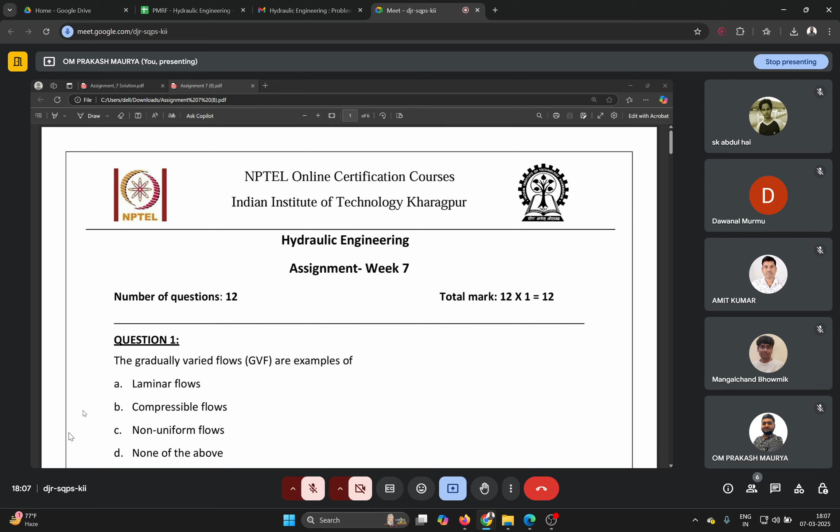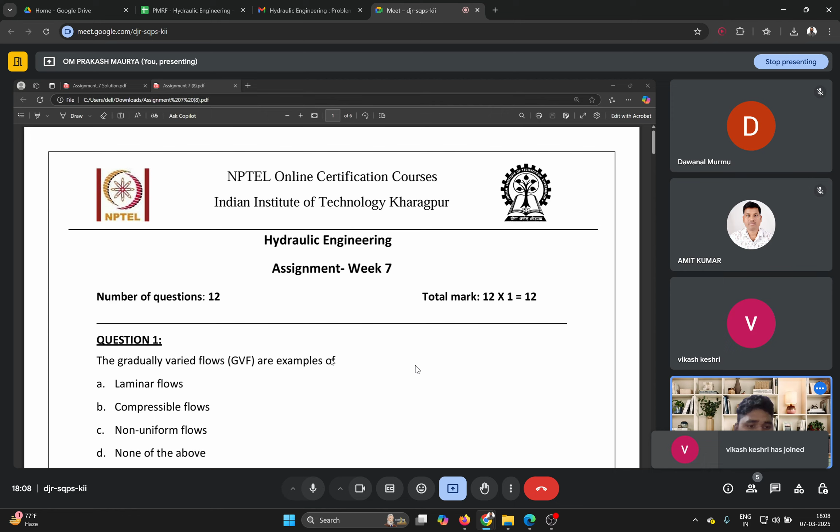Okay, let us start. So the week 6 content I have already recorded and uploaded. So please, hope you all visited.

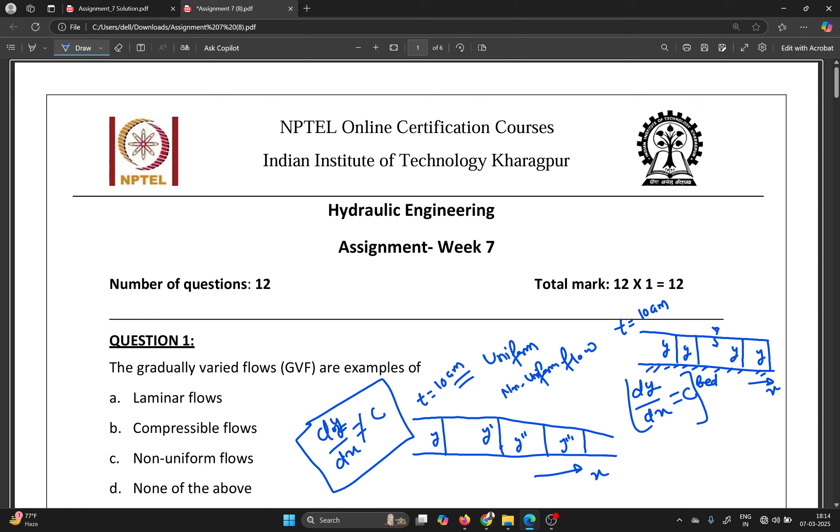But here the question is about gradually varied flow. So actually non-uniform flow has two types: one is GVF, gradually varied flow, and RVF, rapid varied flow. So gradually varied flow means - whatever the depth is changing, it changes for a long distance. The change, that is y to y dash to y double dash, is very gradually changing. So that is gradually varied flow.

A rapid varied flow means - let us suppose here is a gate, and water is here, water is like that. Here the depth is very less, here depth is increasing within a short span of distance, the depth varying much from this level to this level. So such type of flow is known as rapid varied flow. Always remember please. So the answer of this question is non-uniform flow - gradually varied flow is non-uniform flow. Hope you all got it.

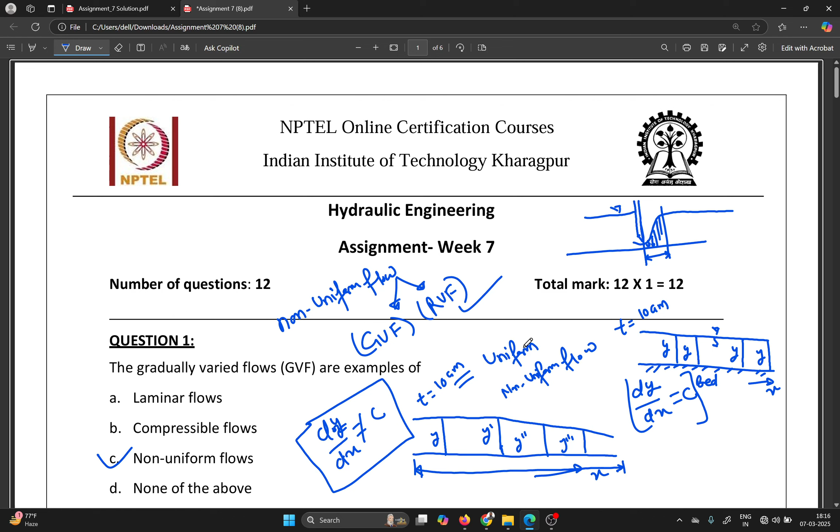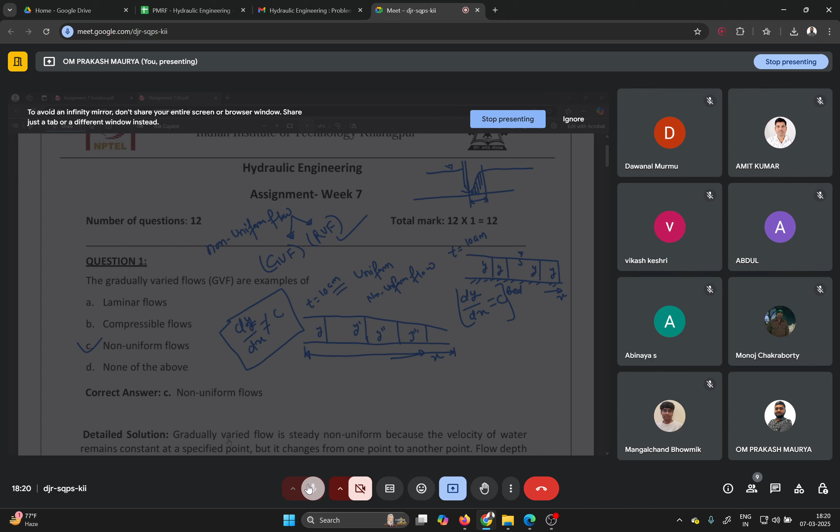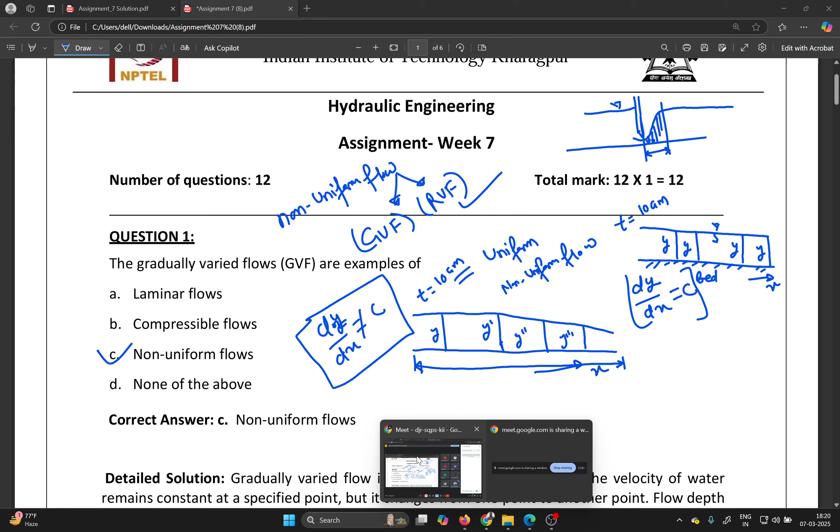Okay, so hope everyone got it, question number one. If you're not able to, whether you are getting it or not, let me open the video. Yes please, whether you all are able to understand or not, question number one. If anyone is not able to understand, I can re-explain, otherwise I'll move to question number two. Please, if you have not got it, write in the comment.

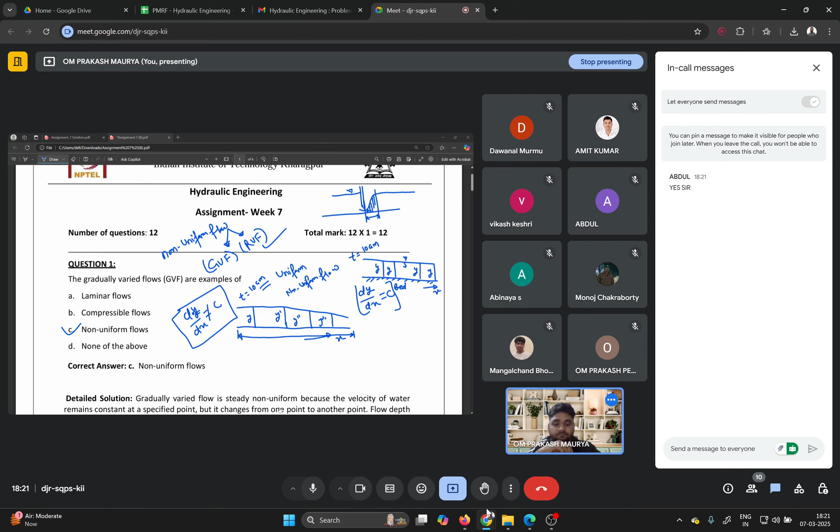Okay, here the answer is visible. The dynamic equation of gradually varied flow is based on the assumption that the equation of gradually varied flow is dy by dx equals dE by dx divided by 1 minus Fr square. Here dE by dx is S naught minus Sf. Remember, that is the change in energy with respect to distance, or you can say specific energy, not energy, specific energy.

In the derivation, we assume the pressure distribution is hydrostatic. Here it is non-hydrostatic, so this statement is irrelevant, not considered. Roughness coefficient depends on flow depth - this is also wrong. So that's why the answer is none of the above.

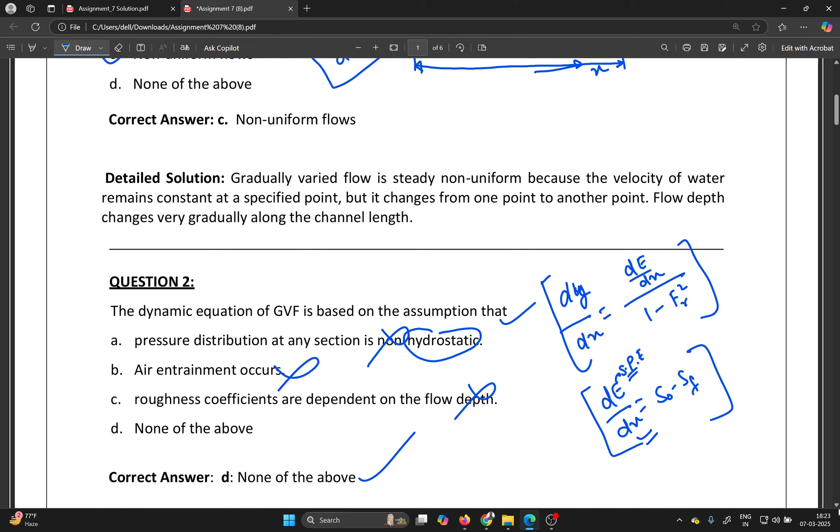Now we'll move on to the next question. Question number 3, very important question: the value of specific force at two flow depths y1 and y2 in a natural open channel is the same. Then the depths y1 and y2 are called: sequent depth, alternate depth, either of both, or none of the above.

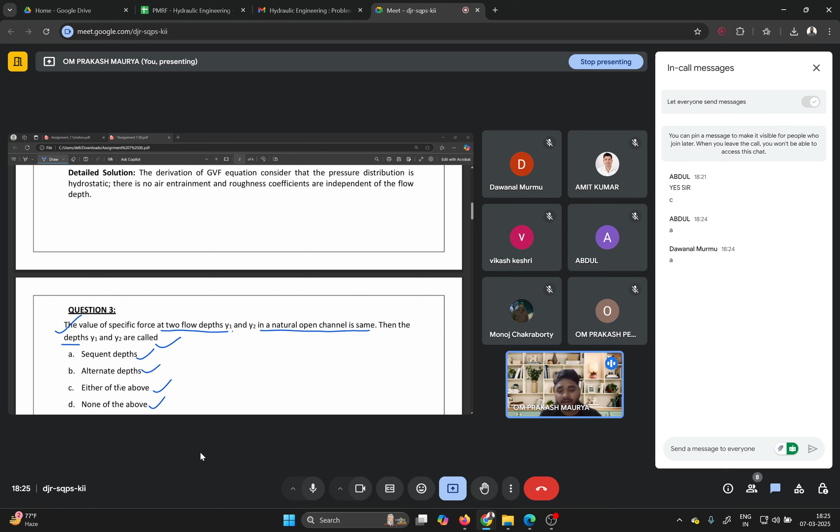For alternate depth, the specific energy should be the same at two depths, then you can go for alternate. The answer would be alternate, but here it is specific force. So option A will be correct for question number 3.

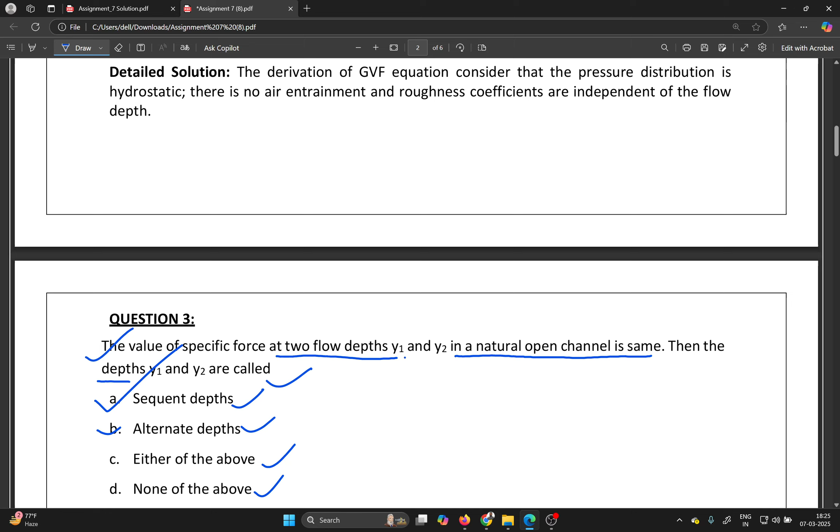Now we'll move on to question number 4. The question is: total number of possible types of GVF profile. Please everyone write your answer. Total number of possible gradually varied flow profiles are: 12, 5, 6, or 10.

So actually we have 5 types of slope. First one is mild slope, second one is steep slope, third one is critical, fourth one is horizontal, and fifth one is adverse. In these 5 types of slope, how many profiles do you have - whether 12, 5, 6 or 10? As a hint, I've given you the 5 types of slope we have in hand.

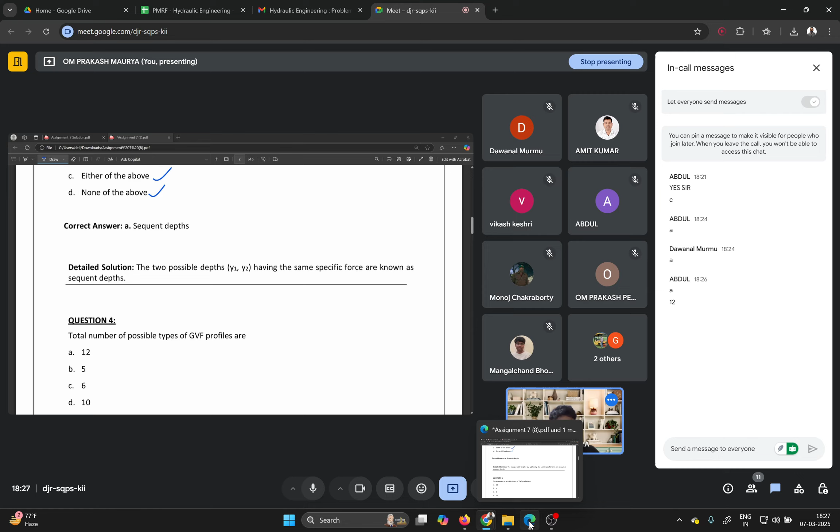Okay, let me explain a little bit. So actually in GVF profile you have 12. Yes, option A is correct, but how?

We have 5 types of slope: one is mild, second is steep, third is critical, fourth is horizontal, and fifth one is adverse. Mild is like that, steep will be very like that, critical you may assume like that, horizontal is complete horizontal, and adverse slope will be just opposite.

All slopes go in this direction - but the slope direction, not the flow, I am not showing the flow here, just the slope direction. So we have here 3, and here also 3, here 2, here 2, and here 2. So 6 and 6 makes 12. For how this works, you need to go through the detailed video whatever sir has already taught in week 7 content, so you can get a very clear concept about the 12 profiles of GVF.

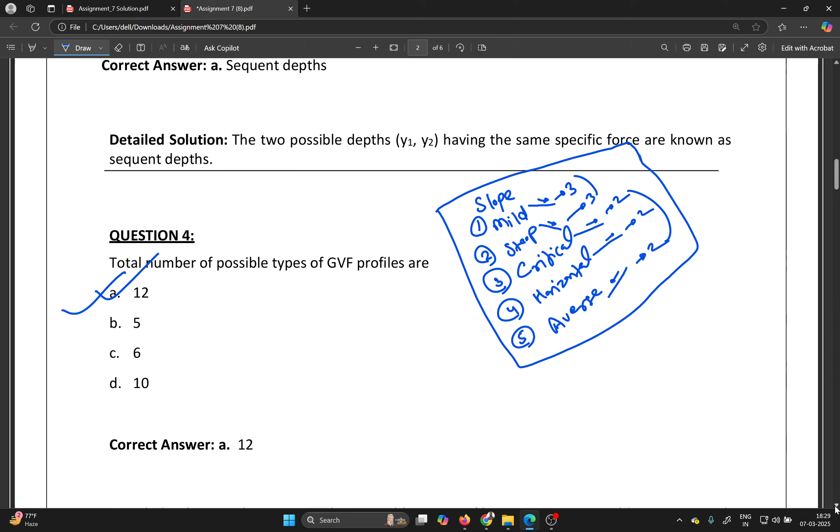Now we'll move on to question number 5. Question number 5 is: in GVF, as the value of water depth approaches the uniform depth, or you can say the normal depth, the water surface meets the normal depth line vertically.

Or it meets a very large depth as a horizontal asymptote, or approaches the normal depth line asymptotically, or none of the above. Which option will be correct for question number 5? Everyone please write your answer in the chat box.

For question number 5, in GVF, as the value of water depth approaches the uniform depth, the water surface approaches - option A is meet the normal depth line vertically, option B is meet a very large depth as a horizontal asymptote, option C is approach the normal depth line asymptotically, and option D is none of the above. Which option will be correct for question number 5? Everyone please write your answer.

These are very important questions.

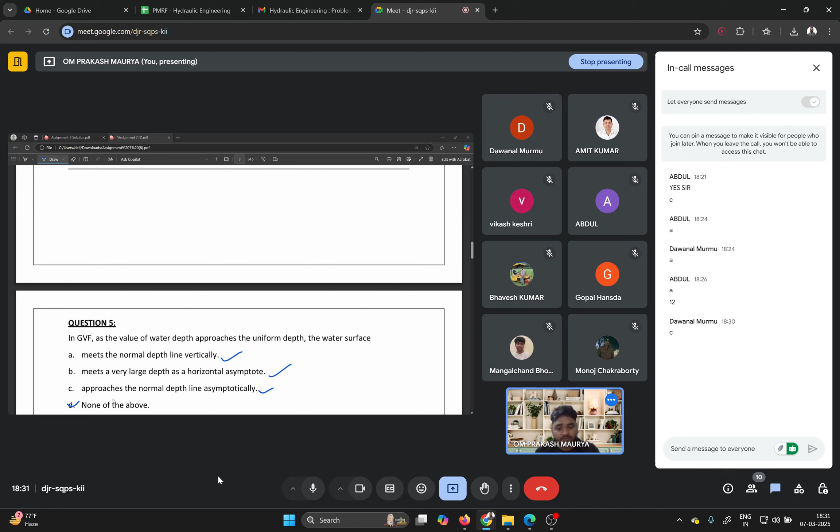C, approach the normal depth line asymptotically. Yes, you are correct. So as the value of water depth approaches the uniform depth, it approaches the normal depth line asymptotically. Means, if I consider the mild slope here, this is your critical line, this is bed, this is your critical line, and this is your normal line, or normal depth line. So here it meets asymptotically, like that. Right, remember.

Option C will be correct for this. For question number 5, option C will be correct. Now we'll move on to the next question.

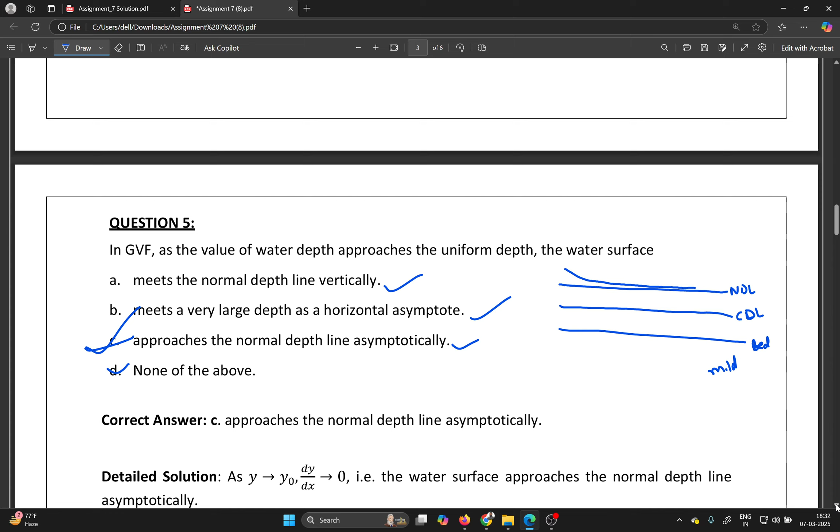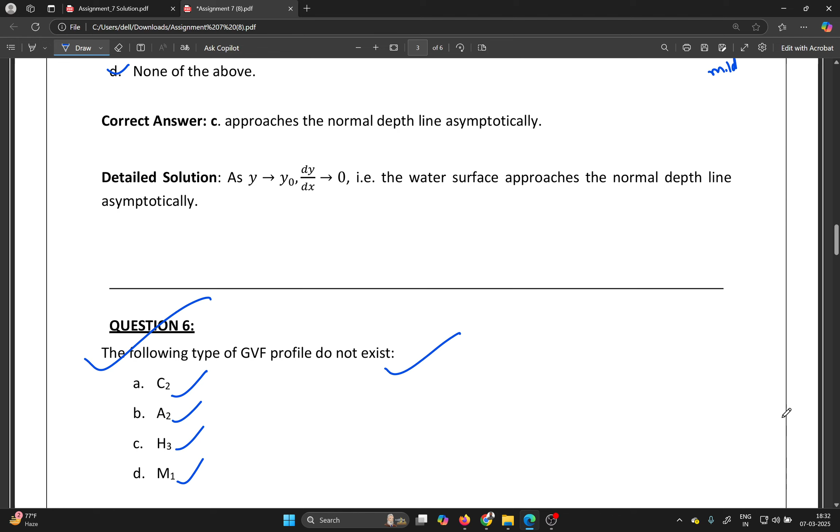Next question is question number 6. The following type of GVF profile does not exist: C2, A2, H3, M1. For question number 6, please write your answer in the chat box. Very easy question. Following type of GVF profile does not exist.

Okay, Abdul is telling C2. Other participants also try to write your answer please. Everyone please. For question number 6, everyone please write your answer. Abdul is telling C2, means option A. But what about the other students? Okay, D, M1 you are telling. Dawanal is telling option D, M1. Okay, you are telling C means H3. Okay, not D, H3, okay.

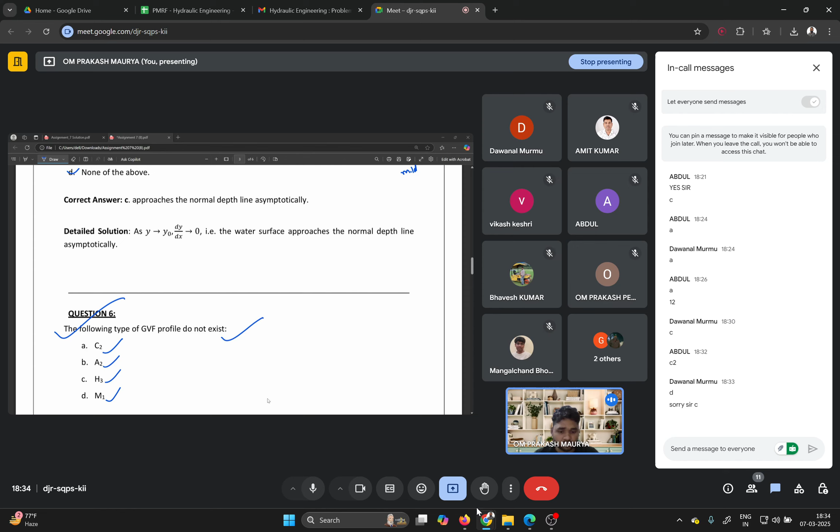So here the answer will be C2. How C2? Let me explain: if your slope is critical, your NDL, this is bed, equal to CDL, critical depth and normal depth will be same. So this is bed, this is your critical depth, and this is your normal depth line. So this is 1, this is 2, and this is 3.

So 2 is zone 2, in between NDL and CDL. Here NDL and CDL is same, so zone 2 will not be possible, but above the NDL is 1 and below the CDL is 3. So NDL CDL is same, so here 3 exists, but 2 is not possible because 2 is in between the CDL and NDL. Hope you all got it.

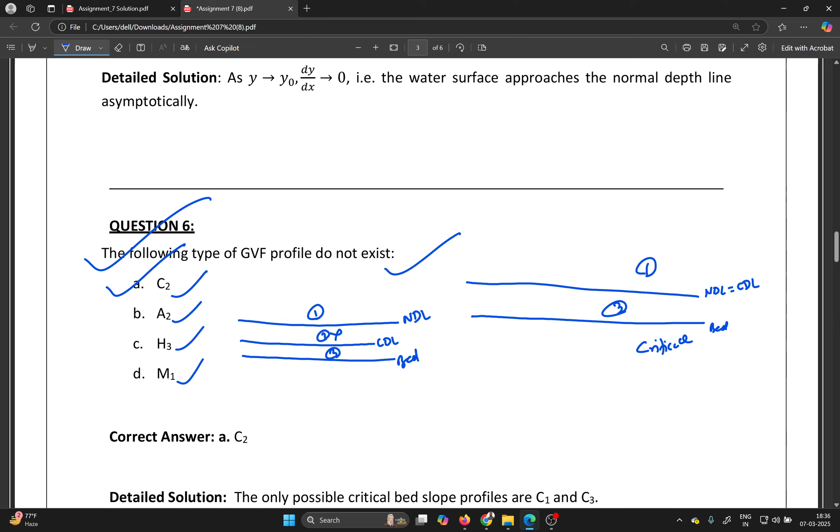Question number 6, now we'll move on to question number 7. The post jump Froude number in a horizontal trapezoidal channel is: less than unity, equal to unity, more than unity, or none of the above. Which option will be correct for question number 7? Just think please.

For question number 7, okay, less than unity. Other students please also try to write your answer. Here we are talking about post jump Froude number. So you have to think after the jump whether flow is critical, subcritical, or supercritical. Based on that, give your answer.

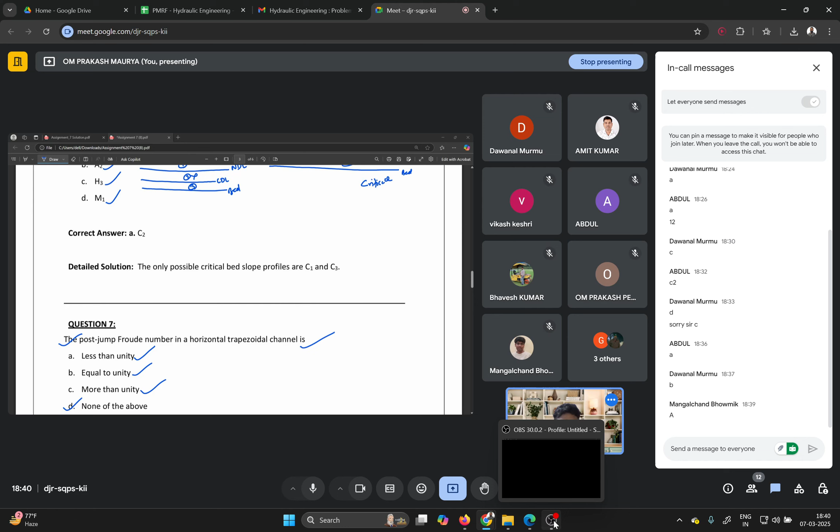Let me just discuss whether A or B, which option will be correct. So just think, after the jump, for hydraulic jump, your flow needs to go through two phases: supercritical to subcritical. Means if I write here supercritical and here subcritical, and here is hydraulic jump, this is pre and this is post. If these two conditions happen, then only hydraulic jump is possible.

So before hydraulic jump, your flow should be supercritical, and after that, subcritical. So here the question is asking about post jump, meaning after. Means subcritical Froude number less than 1, supercritical Froude number greater than 1, and for critical, Froude number is 1. So here we are talking about only post, so your Froude number will be less than 1. Option A will be correct for question number 7.

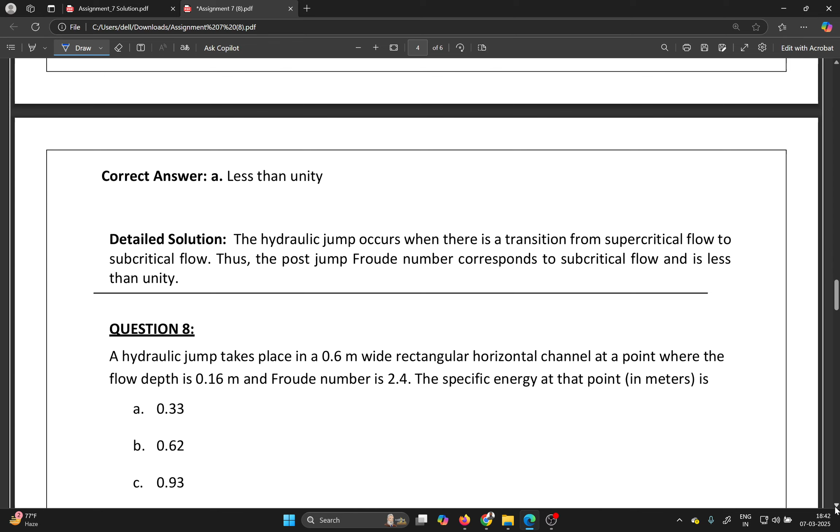Now we'll move on to question number 8, very important question. A hydraulic jump takes place in a 0.6 meter wide rectangular horizontal channel. Rectangular horizontal channel, remember please, horizontal channel means theta will be 0 degree. Rectangular you all know. At a point where the flow depth is 0.16 meter and Froude number 2.4.

Specific energy at that point, you need to calculate specific energy. So everyone please first understand the question, then try to solve it. Everyone please. Very important question, actually very fundamental and basic question. So everyone please try to first understand, then try to calculate.

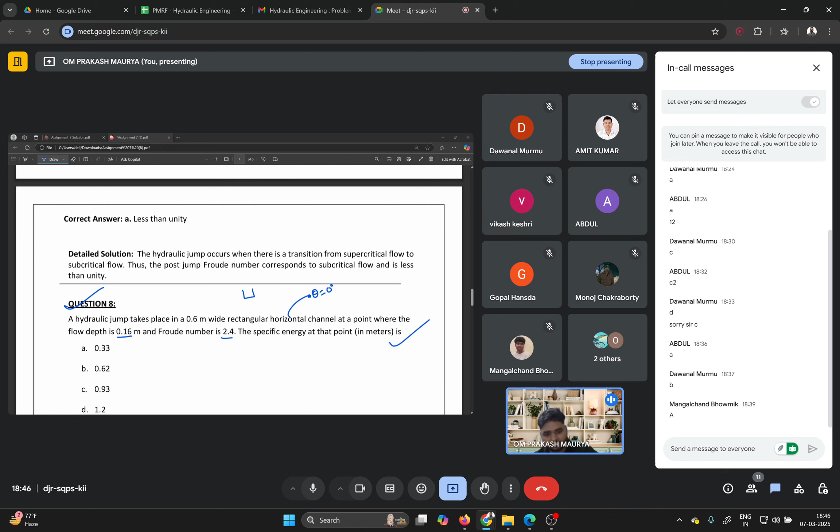Okay, let me discuss. So here we have a rectangular channel with theta 0, 6 meter wide, 0.6 meter, where the flow depth is 0.16. The Froude number is given as 2.4. Specific energy at a point is equal to Y plus V square by 2g, for theta equal to 0 and hydrostatic pressure distribution.

Based on these two assumptions, your specific energy formula will be like that. So Y is given as 0.16. V is not given, so you know Fr equals V over root of gY. For a rectangular channel it will be Y, otherwise Fr equals V over root of g times A by T, or D equals A by T, so here you can put the T. That is the hydraulic depth, not hydraulic diameter. Okay, we have the question.

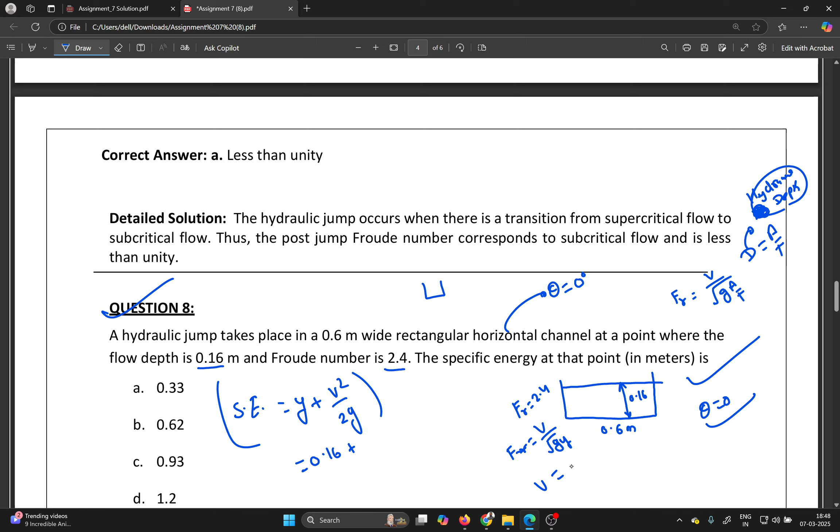We'll clear the terminology later. So here, you can calculate V: 2.4 into root of g into 0.16. So V is how much? Please anyone write the answer. What is the value of V? Please just calculate and write in the chat box.

Or let me just calculate. So 9.81 into 0.16 is equal to root over into 2.4, that is 2.68 velocity. Okay, final answer you are telling 0.62. Let me just check. So 2.68 velocity meter per second. Here you can write 2.68 square divided by 9.81, 2 into 9.81, so divided by 2, divided by 9.81, plus... oh sorry, 2.68 square divided by 2 divided by 9.81.

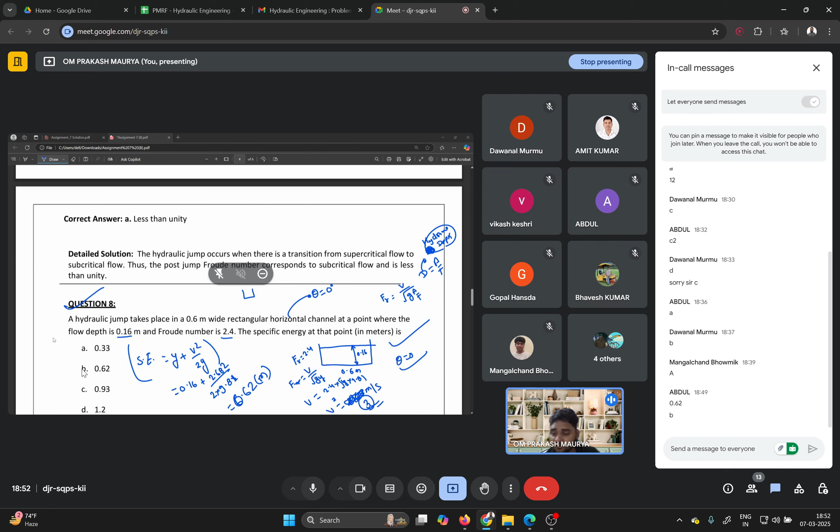Now we'll move on to the next question. Next question: in the above problem, if the post jump flow depth is 0.47 meter, then the energy loss associated with the jump is... Here the post jump flow depth is given. Pre jump was given previously as 0.16 and post jump is given as 0.47. Now you need to calculate energy loss. Very important. In the previous week 6, I discussed the formula for energy loss, but here you need to write first your answer for question number 9.

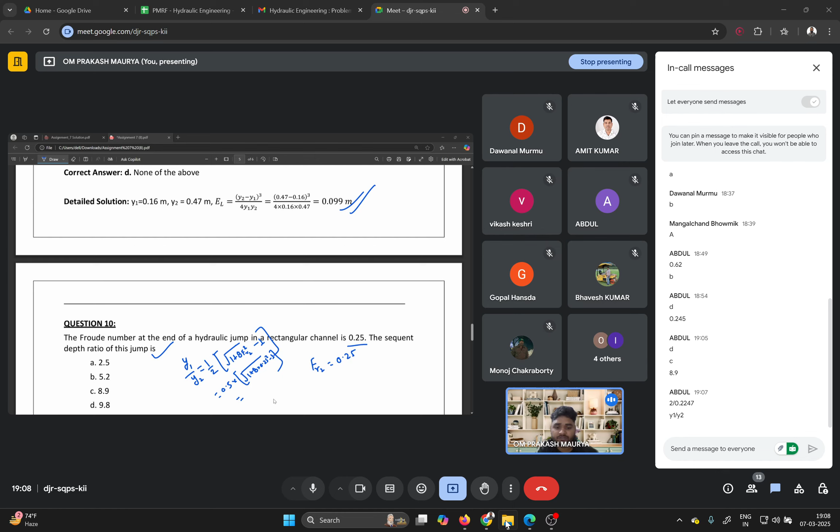Okay, you are telling y1 by y2. Okay, I have put it as y1 by y2. Let me just see the calculation. Yeah, the answer is 8.9. So yes, I got this one. 0.112. Yes, the calculation is y1 by y2 is 0.1123 I am getting. But here, if the answer is not matching, you need to just write like that. You just check whether this is matching or not. If this is not matching, then it means your answer is wrong.

But if y1 by y2 is not matching, let me just check y2 by y1. So just the opposite: 1 divided by 0.1123. Yes, it is 8.903. So you can write 8.9. So like that you need to check also, because here it is asking about the ratio, depth ratio. It doesn't mean like that you need to give only y1 by y2. You can also give y2 by y1. So based on that you check your answer here.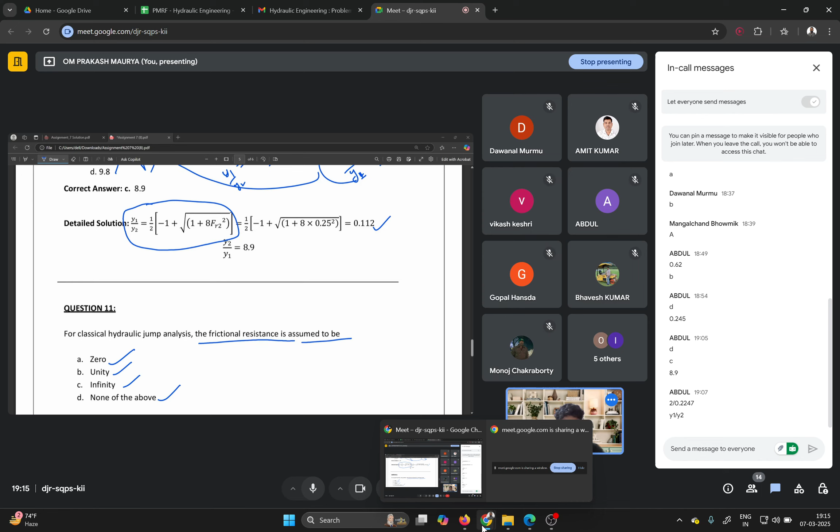Okay, now let us start. So for classical hydraulic jump analysis, the frictional resistance is assumed to be 0, because the hydraulic jump actually happens within a short span of length, so we can neglect the frictional resistance. In the derivation we neglect it for simplification. And classical hydraulic jump means jump in a rectangular channel.

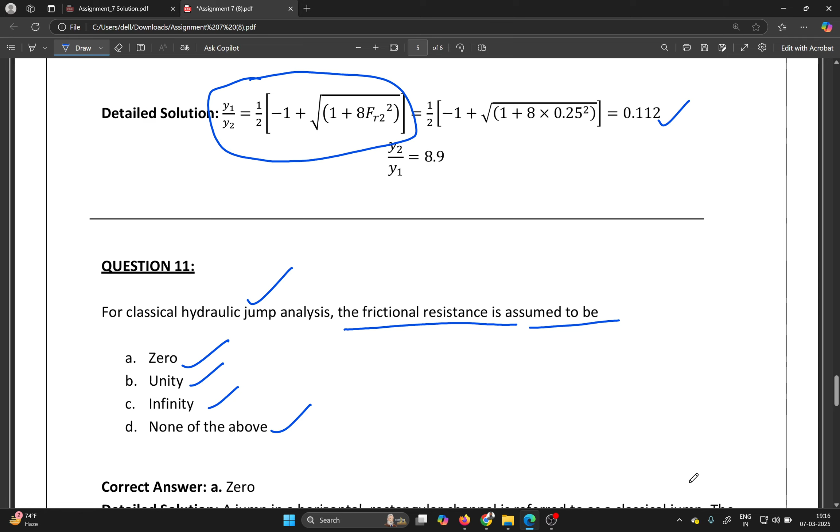Okay, next question, question number 12: the mathematical analysis of hydraulic jump is based on conservation of kinetic energy, total energy, linear momentum, or all of the above. Please everyone, for question number 12, everyone please write.

D, all of the above. Okay, Amit is telling all of the above. Other students please. The mathematical analysis of hydraulic jump. Okay, Anurag is also telling D option, all of the above. Anyone want to write? Then after this, actually we have only 12 questions in this set. I have another set also, so we'll solve another 12 questions. So okay, Mangal Chand is also telling D.

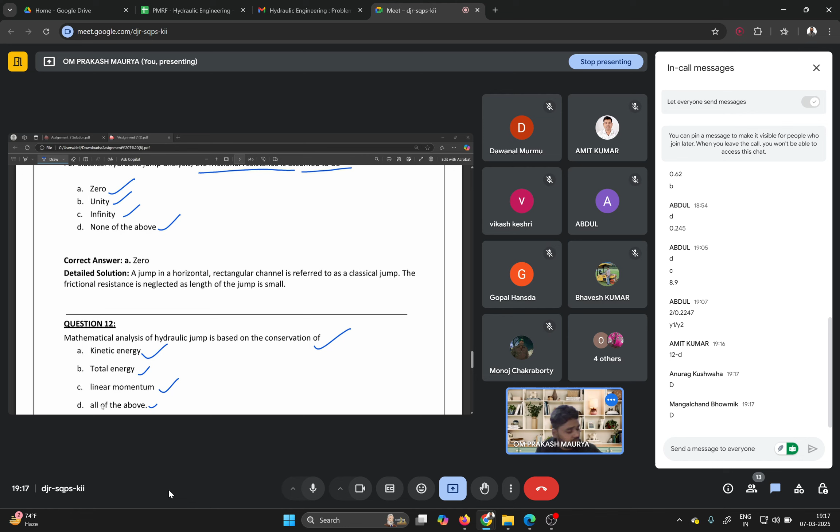So actually in hydraulic jump, during the derivation, the energy is not conserved. Why? Just for example, let us suppose a jump is happening. Here energy is not conserved because of energy losses in the jump. So we will not use the total energy concept for the derivation. We only use the linear momentum concept for the mathematical analysis of hydraulic jump. We cannot use the energy concept. Remember always please: this is because of the loss in energy during the hydraulic jump. So we don't know how much loss. If we don't know how much loss, then how can we apply the energy concept here? So we'll use the linear momentum concept. Remember always.

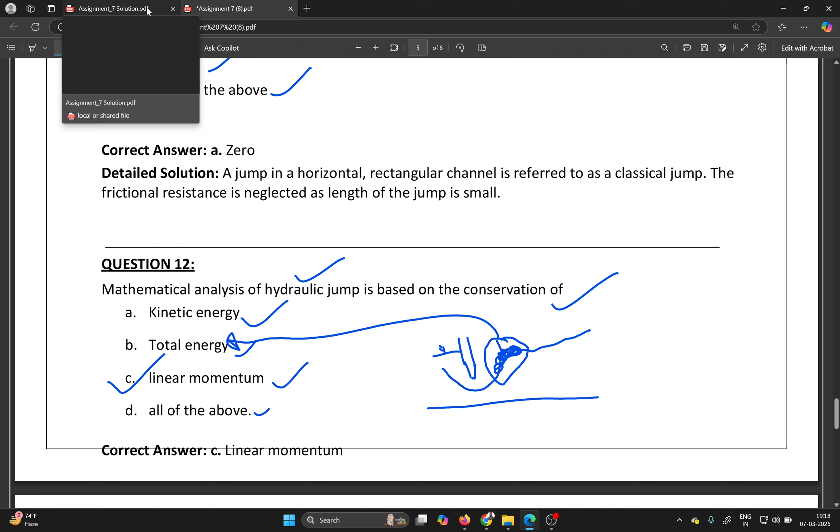So now let me just... question 1. Oh, I think it's not visible. Okay.

Whether it is visible, okay. Question 1 is visible. Please everyone write, anyone can write.

So question 1 is, if the value of rate of change of specific energy is 7.03 into 10 to the power minus 4 meter, and SF, that is slope, energy slope, is given as 0.00013, calculate the value of bed slope. So here you need to calculate the bed slope value.

So just in the previous set of questions I have told you the equation of gradually varied flow. In that equation I discussed about the rate of change of specific energy and the formula also. So please think and try to calculate, and write your answer in the chat box for question number 1.

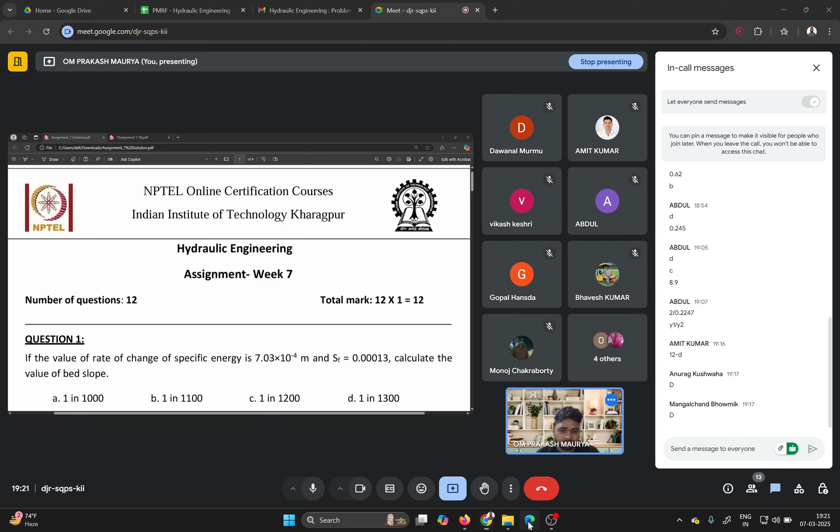Important question. Everyone please. So the formula is S naught minus SF. Now please you need to calculate S naught from here. Please everyone try to calculate for question number 1. Everyone please.

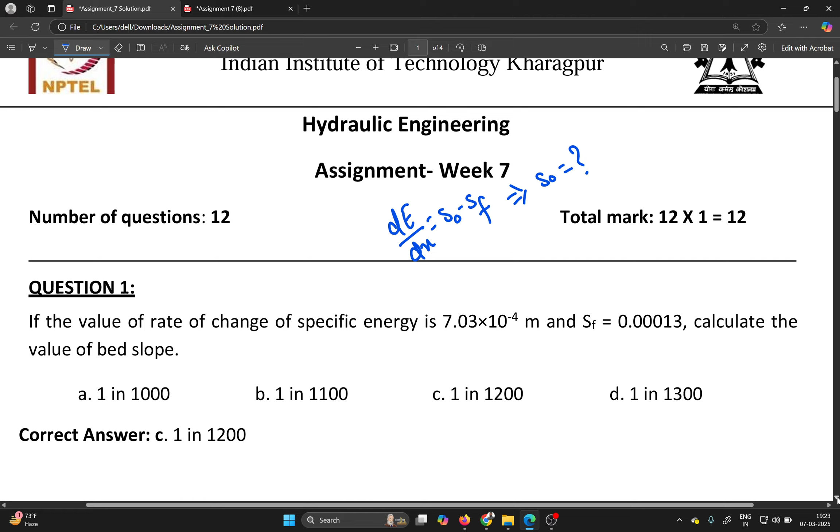Now we'll move on to question number 2. Question 2 is about when the hydraulic jump is in a moving form. Moving form means the hydraulic jump is called negative surge, positive surge, turbulent surge, or accelerated surge. Moving surge means, let us suppose a bed, and the surge is moving like that, moving in the flow line.

So please write your answer for question number 2. Okay, D option, accelerated. Other student please. C option, turbulent surge. Other student please, Monoj is telling C, Abdul is telling B, D. Anyone?

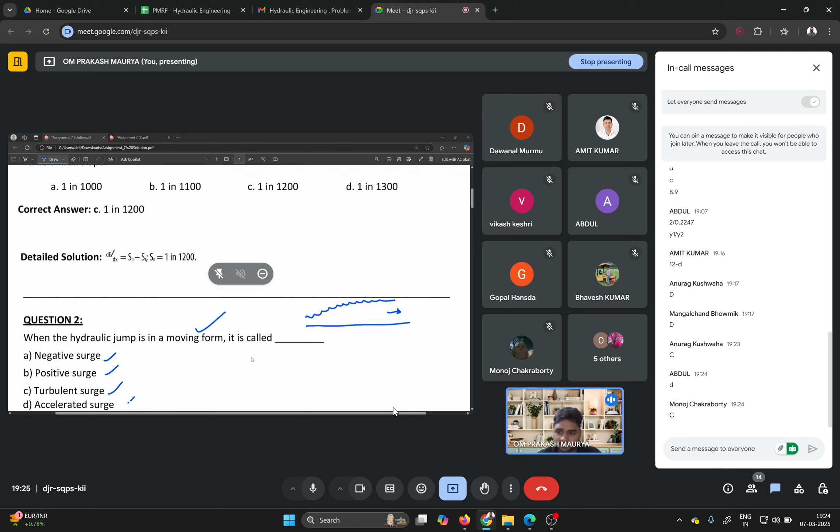So the answer of this question is, when the surge is moving, if it is increasing the depth then it is positive, and if it is decreasing the depth then negative. So when it is moving in this direction, moving like that, it means positive surge. Remember please, for question number 2 your B option will be correct.

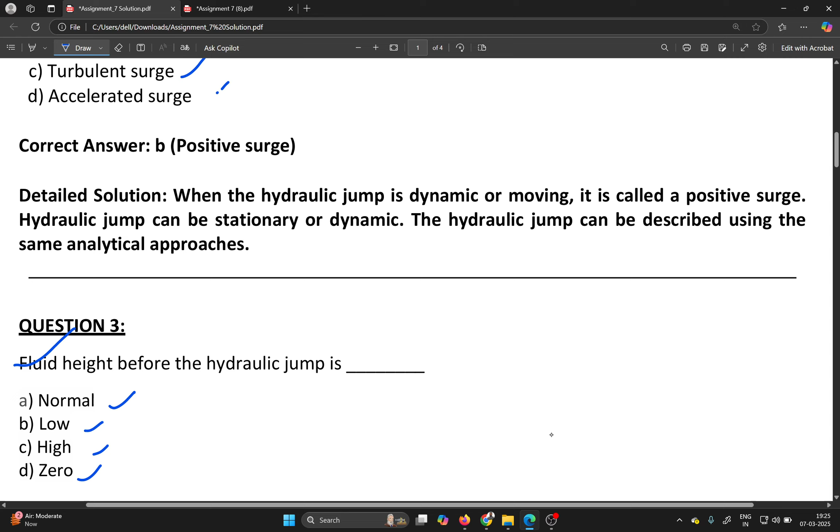Next question. The fluid height before the hydraulic jump, whether it is normal, low, high, or zero. We are talking about before the hydraulic jump here, remember, before. Please everyone try to write.

Before the hydraulic jump, you are telling option A, Monoj. Low, okay, Amit is telling low. Abdul is telling B, low, yes. Other student please. Before, because you know already for hydraulic jump you need to have supercritical flow. Your flow should move from supercritical to subcritical. Then in supercritical, whether flow is low or high compared to subcritical, think on that and try to write your answer.

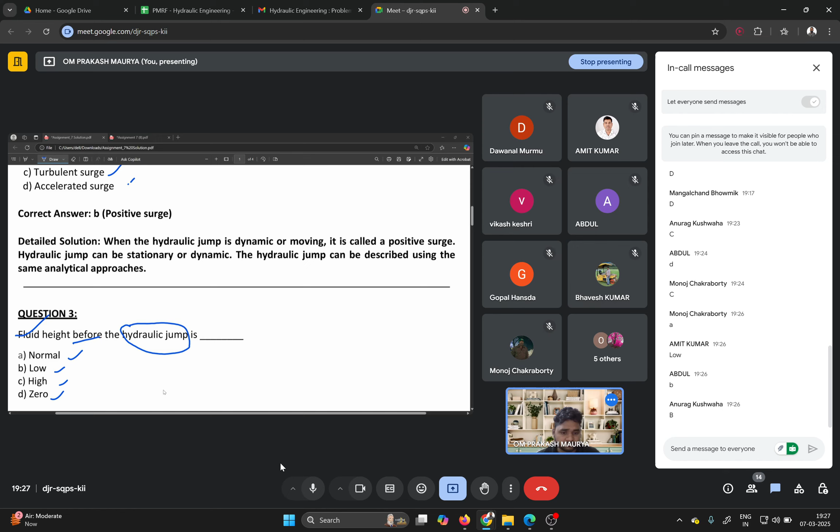Okay, most of the students are telling B option, low. Other student, anyone can write. Other student please also write your answer. So yes, the flow depth will be low compared to post jump.

Here someone's answer is C, but that answer is wrong, it's B. Remember please, low. In the description it is written very well: the fluid height after the hydraulic jump is high. But here the question is asking before, so maybe it's a typing mistake here. Option B will be correct.

Now we'll move on to the next question. Here the answer is, as you can see, the energy is not conserved throughout the hydraulic jump. Yes, as I discussed just a few minutes back, the energy is not conserved throughout the hydraulic jump because there are some energy losses in the jump. So yes, it is correct.

Now, next question. Next question is to calculate the mean hydraulic depth of channel. Mean hydraulic depth, remember please, what we were talking about previously: Fr is equal to V by root of GD, that is D is equal to A by T. This is your hydraulic depth, mean hydraulic depth.

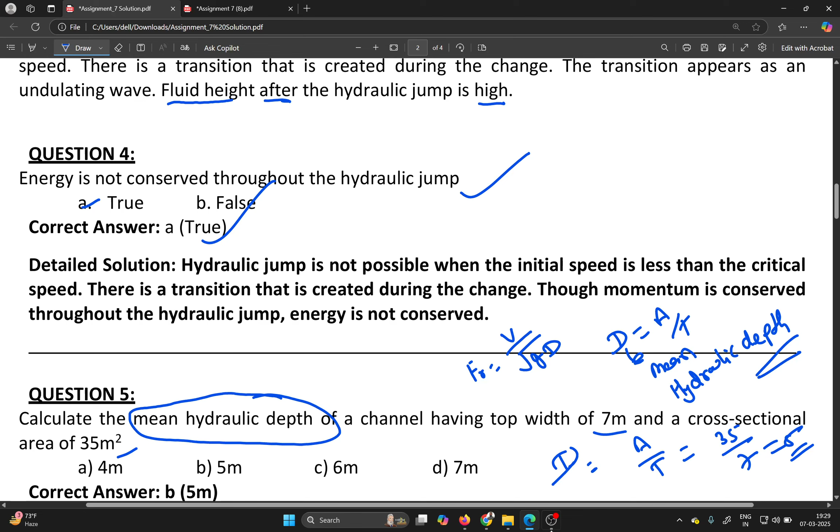Next question, question number 6. What is the Froude number for a channel having mean velocity 4.34 and mean hydraulic depth as given? So you need to calculate the Froude number. Please everyone write your numerical value in the chat box for question number 6. Very easy question, just think and calculate and write your answer.

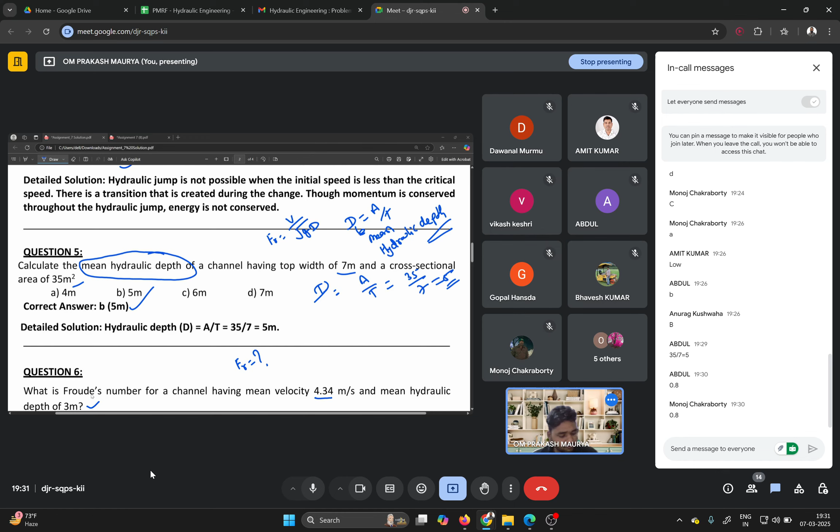FR is equal to V divided by root GD, as I have written here. D is your mean hydraulic depth. Remember, depth, not diameter, mean hydraulic depth. So velocity is given as 4.34 divided by root 9.81. Depth is already given, hydraulic mean depth is 3.

Let me just calculate: 9.81 into 3, square root equals 5.425. 4.34 divided by 5.425 equals 0.8. Yes, the FR is 0.8.

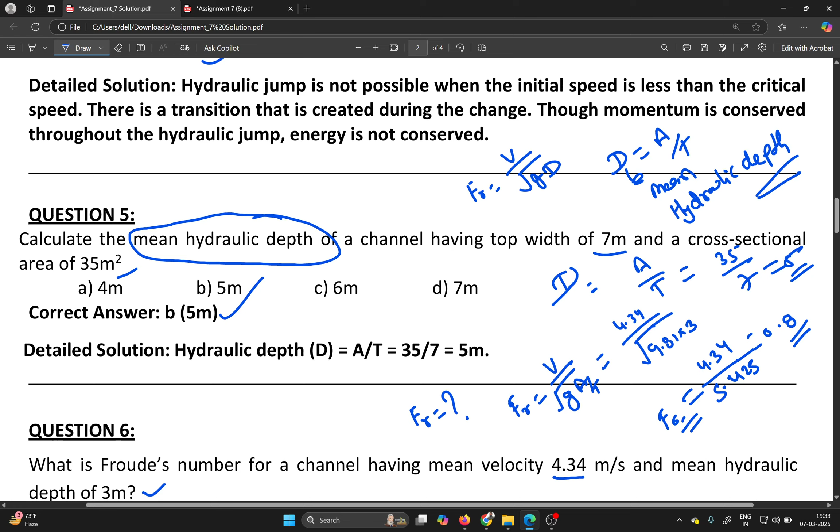Remember please. Now we'll move on to the next question, question number 7. Calculate the mean hydraulic radius for a channel having 20 meter square cross sectional area and 50 meter of wetted perimeter. Mean hydraulic radius.

Very easy question, please everyone. 0.4, okay. Other student, please, very basic question from open channel. Mean hydraulic radius. Okay, Abdul is only telling 0.4. Other student, please also write your answer.

So here I'll tell you one more thing: mean hydraulic radius, and also hydraulic diameter and mean hydraulic depth, three things I'll discuss in this question. Very important. I'll also discuss a little bit about Reynolds number in case of circular pipe and in case of open channel. In an elaborative way, I have explained this in week number 6 recorded video, but here I'll explain because the term here is mean hydraulic radius.

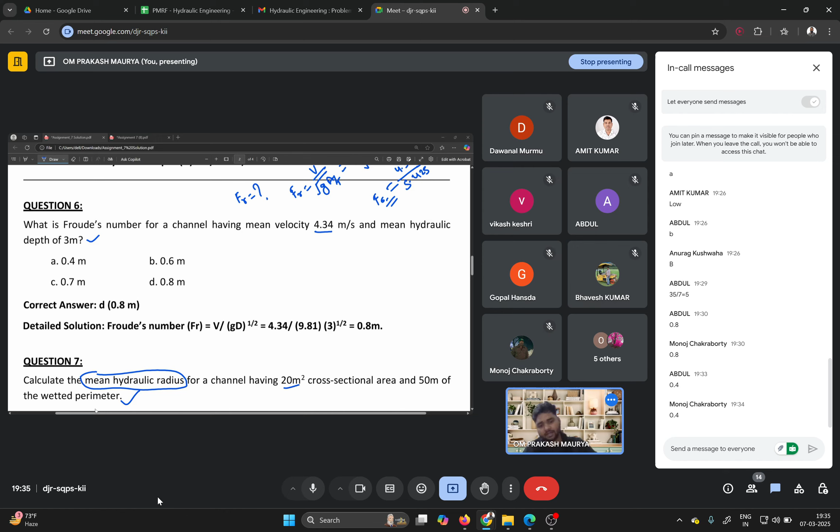So please, other students, also write your answer for question number 7. Okay, Monoj is also telling 0.4. Okay, I think you all are correct. So mean hydraulic radius, if I represent with R, or sometimes people represent with HR, the formula is wetted area divided by wetted perimeter.

So wetted area is given as 20 and wetted perimeter is given as 50, so here you can calculate very easily, 0.4 meter. What is wetted area? Wetted area is nothing but, if this is the channel and this much water is flowing, these are the areas that are wetted, and above area is dry. So we will not consider the above area. This area is wetted, so we will consider this area only. If the channel is like that and only water is this much, we will consider this area only, wetted area.

And perimeter also, wetted perimeter, whatever your surface is wet to the liquid, that surface only we consider as the perimeter. If this is 2, this is 3, this is 2, so your perimeter will be 3 plus 2 plus 2, means 7. So like that you will calculate perimeter. And area you already know, area means depth into width, means 6. Okay, so hydraulic mean radius you already know this one.

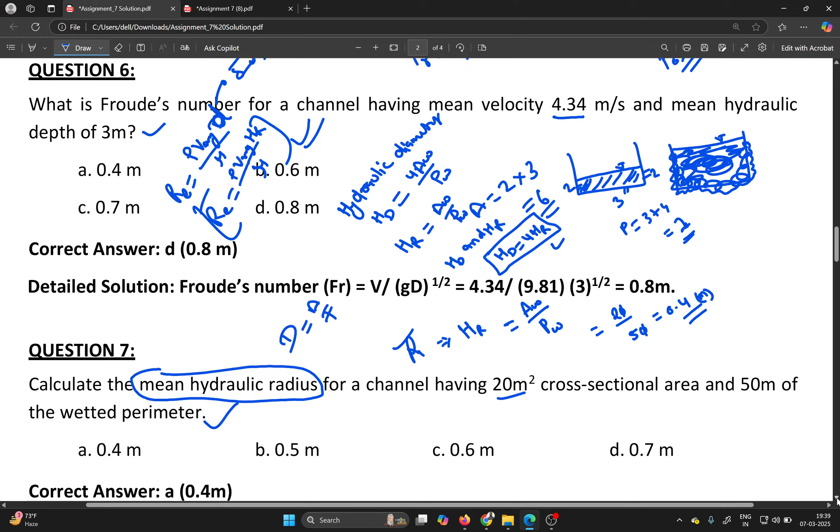Okay, now we'll move on to the next question, question number 8. Okay, this is also important. When the energy is at minimum for a flow discharge, it is called: normal depth, roughness, critical depth, or hydraulic radius. Very important. I'll explain a little bit about specific energy and depth curve, but before that, try to give your answer. When the energy is at minimum for a flow discharge, it is called normal depth, roughness, critical depth, hydraulic radius. C option, critical, okay, Abdul is telling C, that is critical.

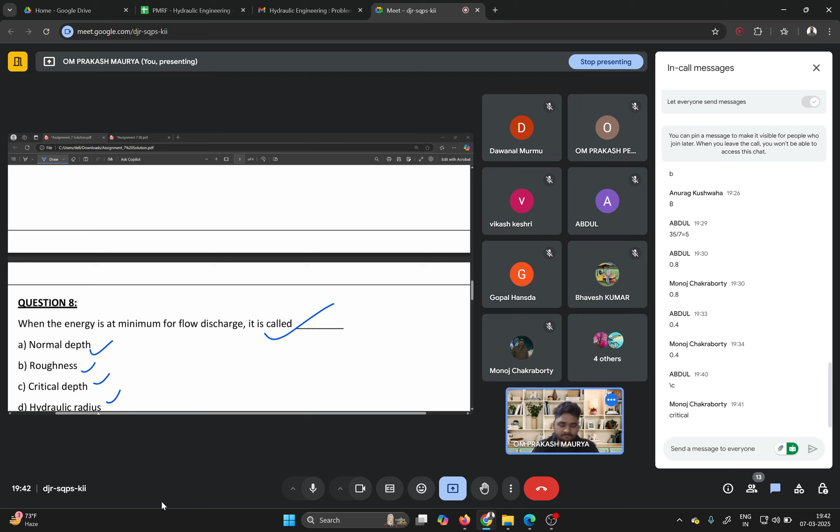Other student, please. Other student, please also try to write your answer for question number 8. Another 1 minute I'll give you, then after I'll explain. Okay, Monoj is also telling critical depth. Yes, critical depth is correct.

So let me discuss a little bit. A specific energy, you already know, Y plus... Actually, let's discuss a little bit from total energy. Total energy is nothing but datum head plus pressure head plus velocity head. But we assume the pressure distribution is hydrostatic, rho g h, or rho g y, you can say depth of the flow. So your h will be z plus y, rho g will be cancelled out, and v square by 2g. Specific energy is nothing but...

So here z is datum. If we consider z is equal to 0, means the datum we have considered is the bed of the channel, the bed is the datum, means z is equal to 0. So specific energy will remain y plus v square by 2g.

So here when you will draw on curve, that is E and here is Y. One equation you have, that is one plot, a straight line, and another you have parabolic, that is Y square. After combining this, you will get a curve. This is your complete straight line, but after combining, you will get this graph only, not this one. Dot dot, just I am showing you for your visualization point of view. You will get like that.

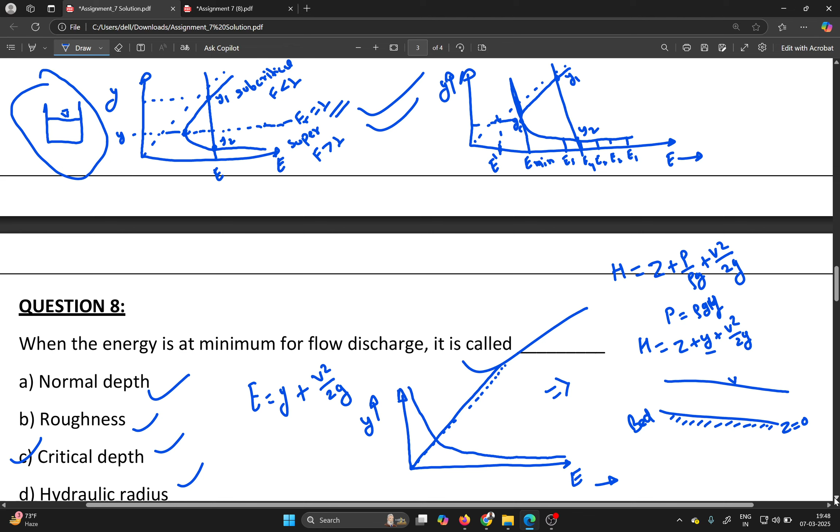Okay, now we'll move on to the next question. Next question is question number 9. Calculate the maximum discharge through a triangular channel having a side slope 1 is to 2, 1 horizontal, 2 vertical, and critical depth 3 meter. The maximum discharge here you need to calculate. So everyone please try to calculate the maximum discharge.

Yes, one thing I forgot. This line, the energy line, whatever you are drawing, this line is only for a particular discharge, only for constant discharge. When you will change discharge, maybe the line will shift. When you reduce or increase, the line will shift here and here. It depends. Okay, so this was the thing.

Now calculate your maximum discharge for a triangular channel for question number 9. The side slope is given 1 is to 2, 1 horizontal, 2 vertical. Everyone please try.

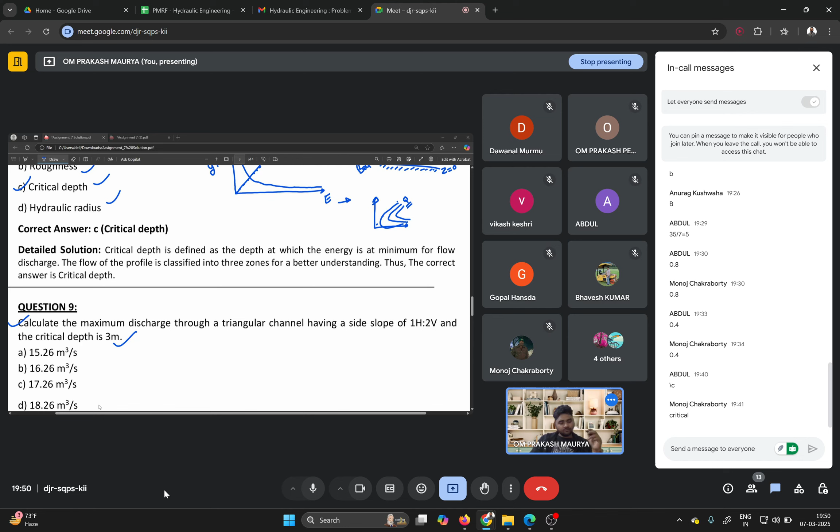Okay, I'll tell you the concept. So here the triangular channel, and flow depth is given 3 meter. This is given 3 meter, and you have the slope, one horizontal, two vertical. When you are moving two vertical, you are moving one horizontal, or one horizontal two vertical, whatever. When you are moving three, then how much horizontal? 1.5. Here also 1.5.

Now for critical depth, Fr is equal to 1, V divided by, root of G A by T, right? And discharge is equal to velocity into area. So velocity is root G A by T. If you will calculate from here, V is equal to root of G A by T, into area. So area is half into B, B is 1.5, 1.5, into depth 3, so 4.5 meter square, and top width is equal to 3, 1.5 plus 1.5. Now you can calculate 9.81 into 4.5 divided by 3, into 4.5. So hope you will get the answer.

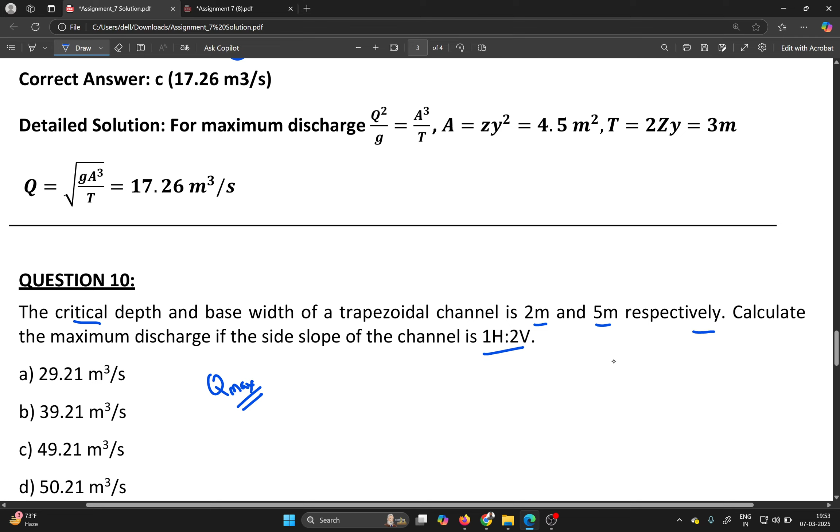Side slope is given 1:2, and here the depth is both side 1:2. Here the diagram is not correct, but just think about it. Okay, let me redraw.

Here is question with ratio 1:2, and critical depth is given as 2 meter, and base width is 5 meter. So you need to calculate Q max. Similar formula you will apply here. So critical depth means Fr will be 1.

So velocity is G A by T. So discharge will be G A by T into velocity. Velocity is this one, into area. So how much area? Area is, if let us suppose this is T, top width. So area is half into T plus 5, into depth 2. This is area.

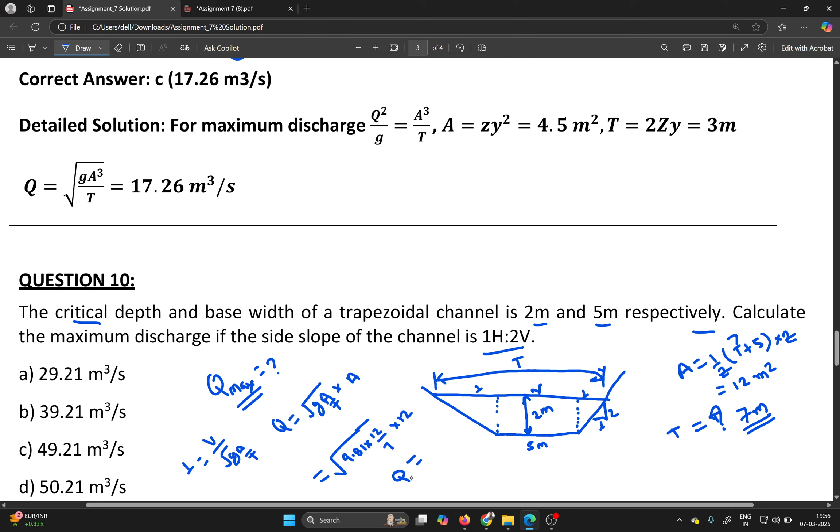G, so 2 will be cancelled out and here will be 7, 12 meter square. So 9.81 into area 12 by 7 into 12. So now you can calculate Q max very easily for question number 10. Hope you got it.

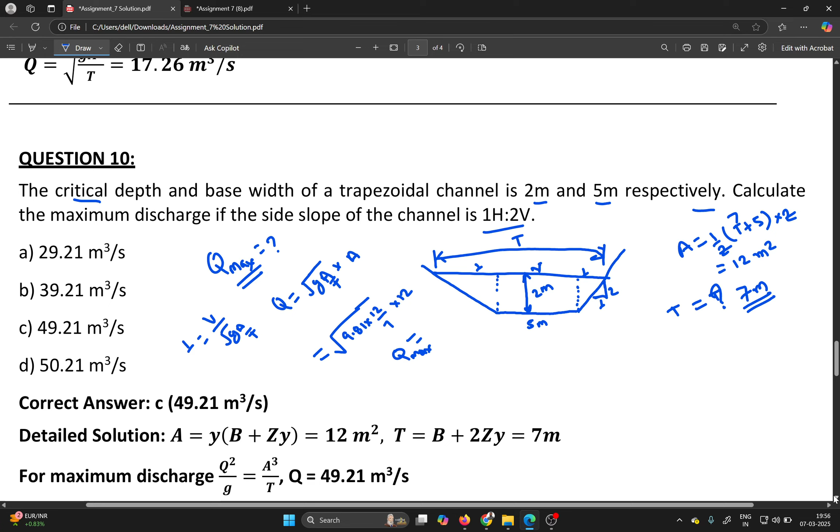Now next question is: the hydraulically economical section of drain for large flow is whether V shape, oval shape, rectangular shape or circular shape. Here option is D, circular, but V shape when you will use when the flow is low. Rectangular for medium flow or moderate flow. Oval shape we use for little bit more and circular shape for high flow.

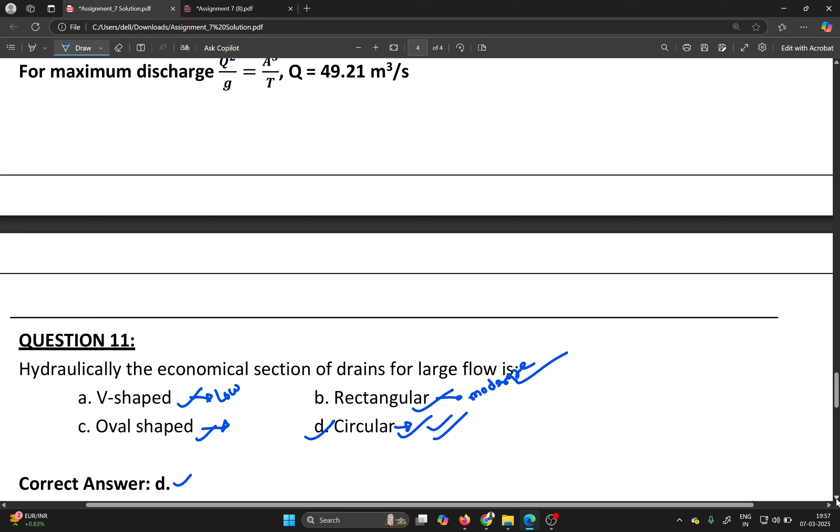And circular section is suitable and economical for large flow. So the question was about hydraulically economical section of drain for large flow, which is your circular section.

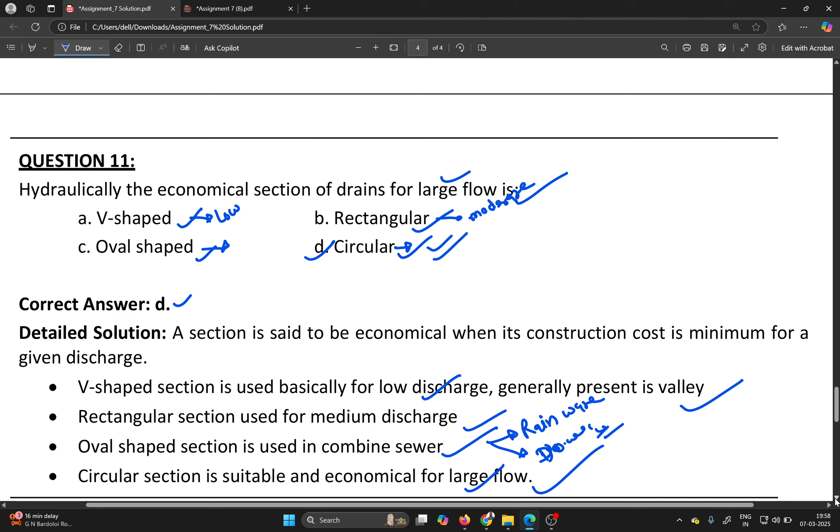Next question number 12: determine the section factor for the channel section having area is 20 meter square. Please everyone, section factor for question number 12. So here I'll tell you two concepts. One is conveyance of flow and what is section factor. I'll explain two things.

Section means, as name suggests, the things will be related with section only, that is your cross section, that is top width and width or depth you can say, and flow conveyance is related with your something convey.

Okay, we don't have time, so let me just discuss. So the section factor is nothing but Z is equal to A root A by T, and your conveyance is discharge is equal to area into velocity, 1 by n r to the power 2 by 3 s to the power 1 by 2.

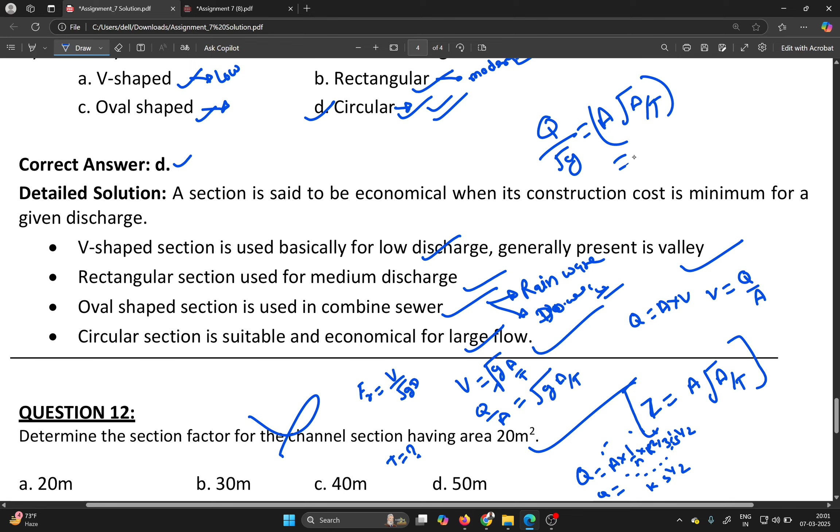So for discharge, let me just convert this velocity as discharge. So velocity is equal to Q by A. So Q by A is equal to root G A by T. So let me just put all the section things in one side. So Q divided by root G is equal to A root A by T. So this value we put generally as Z, Q by root G. So after squaring, Z square is equal to Q square by G. So remember please, section factor you can write like that also and like that. So hope you all got the concept behind your section factor and conveyance.